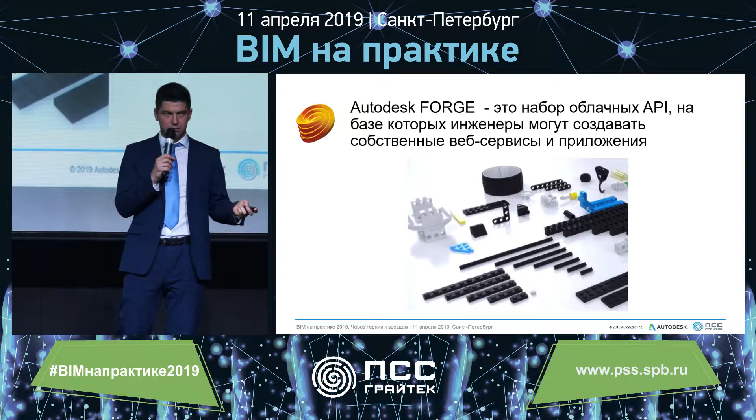I'd like to draw your attention to this definition: that engineers can themselves build their own web services and apps. I listened to the previous presentations attentively, and some of them echoed something about Dynamo. We spoke about Dynamo two years ago, and now Dynamo is a widespread solution for many projects.

So probably we will need to do the same and listen. We will hear the same in two years about Forge. Forge means independent developers, partners, universities, developers, and also customers - it involves customers, people like you. This means that everyone can do this, can be the author of an app.

Vladimir will tell us today about Forge features. But now I would like to tell you briefly about what it's like. There are some Autodesk apps, which you can see at the top of the slide, and there are some other apps and services developed by other developers.

We, on our side, want to use information in any location and at any time. Last year, at this stage, I reported on AI, and today we have some examples on using AI to structure and analyze information and to work with it effectively. People use big data and machine learning methods to be more efficient and to improve performance.

In the center, we see the Autodesk Forge solution, which enables all the functions I've been telling you about. First of all is working with files, data management.

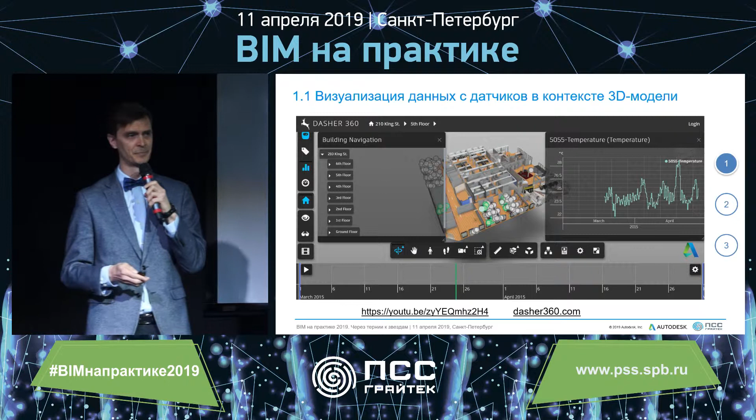It's all visual. We have a web representation of each instance, and we can visualize each of the instances. We can visualize what's happening inside, the dust level and other parameters. In civil construction and in industrial construction, it can also be used. We can track the work of units and equipment.

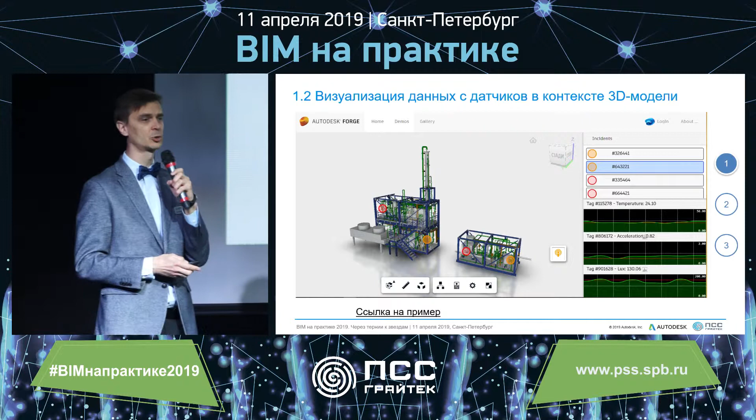Forge can use the 9 modules described by Petr, and we are able to consolidate and unify different CAD systems and consolidate them into a unified database. In this example, there is a simple model that uses data

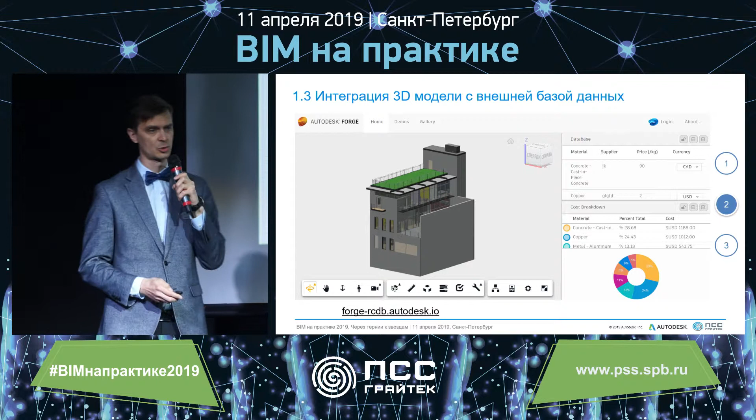about model elements linked to the pricing system, volumes and quantities of concrete. We can add the quantities to Forge, and the total price will be modified, and management will be able to see the changes. So you won't need to do modifications to the web page.

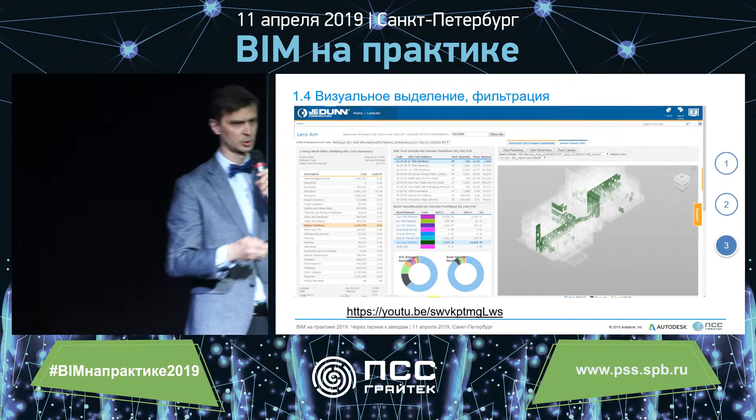It will happen automatically. Another scenario, scenario 3, is about coloring and highlighting interesting elements for decision makers, for management. We see some of the model elements from some of the units that are depreciated, that are getting old and need replacement.

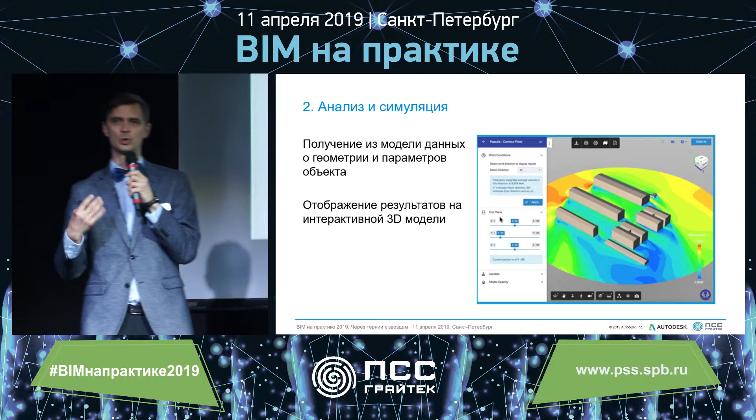The major challenge is when we work with other stakeholders. Very often people do not understand BIM 360 or Navisworks. They are not able to work with this information, use it, or apply it. They need something more, something that can make this task easier for them.

The third scenario is about integrating with our cloud services. In our early speech of Bonava, they use SharePoint Online, BIM 360, and Microsoft Teams, and the foundation of that is a Forge API.

This is the functionality, the feature that is sufficient for BIM 360. The functionality is there, we update it every month. The roadmap is also available for half a year ahead, so we know what will happen next. But users can and want to know more, so we integrate those elements and add new functions and features.

The fourth scenario is called the space scenario. We introduced a function where, using web-based capability, you can do basic modeling without using desktop applications such as Revit, Civil 3D, 3ds Max, etc. You can use just web-based Forge functionality to do some modeling or offload the data. It's flexible, it's easy, it's good.

Another interesting scenario: to ensure user engagement and expert involvement, we use augmented and virtual reality. And this integration is going to be even faster in the future.

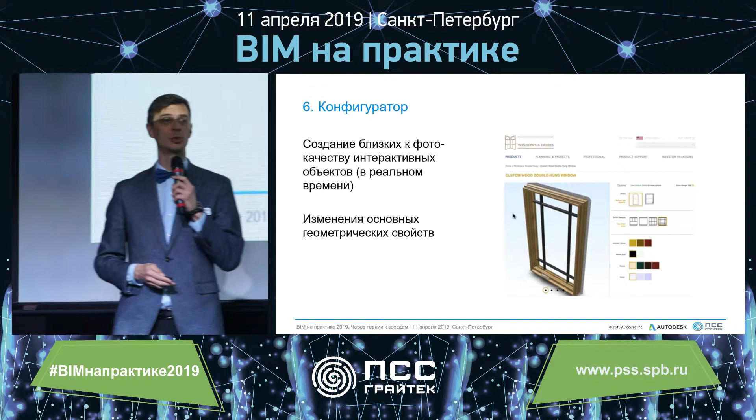Another scenario is the configurator. That's another interesting solution using a web interface. We can allow our clients to set out basic parameters, such as how a window should look, or how an element should look, consisting of one part, two parts, or three parts. So the Forge API transforms the element and transforms it back to upload into the model.

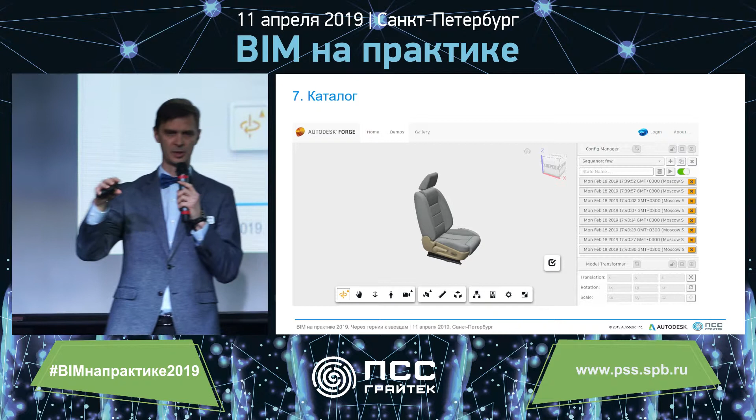Another interesting feature, a very basic feature, is the catalog. It's used very often during the maintenance and operation stage, when an expert selects a certain element and sees the visual representation of this element, and which parameters it has.

So we reviewed all these seven scenarios, and you may have a question: okay, Forge is a cloud solution, there probably are some technical limitations. Well, in fact, there is a nice nuance here.

The dataset can be translated into SVF format and uploaded into a corporate internal server, ensuring local access for your employees to a local interdisciplinary model. When it is changed after a maintenance procedure or something else, we re-upload and update the model, ensuring access and integration of all users without using exclusively Autodesk web-based resources. It's just a nice thing to have.

And last bonus I'd like to show you. There is no link on the slide, but if you send us an email, we'll send you a link.

Digital twin: this is an aviation engine, and you see the integration with several parameters. Performance — you select performance and you see its parameters in real time: rotation, temperature, RPM. And if we select the maintenance tab, we can see each separate element, when it is going to be replaced, how much it costs, who supplies it, and when it's going to be done.

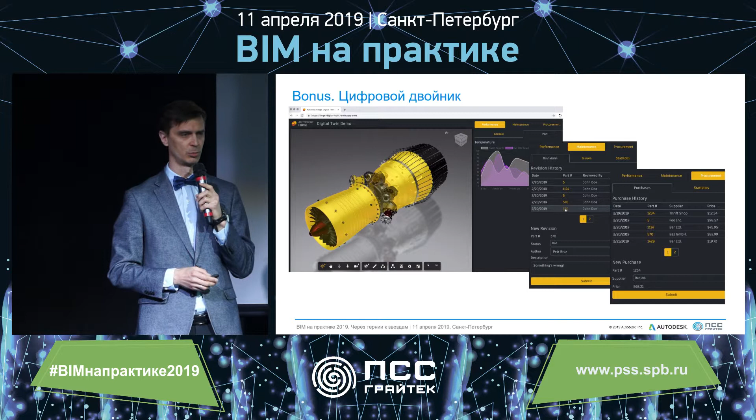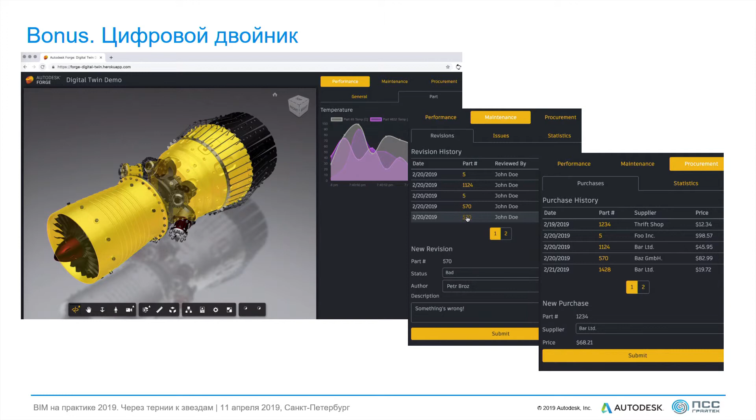And total runtime as well, service life. The web interface also allows you to add additional elements here on the deck and see the frequency of failures of this or that piece of equipment. And the last thing, procurement: cost, supply date. You just push the button and submit the procurement order, the purchase order.

To sum up, there may be different scenarios: engineering data visualization and dashboards, project by project; automation — previous speakers have all mentioned this. We cannot wait until a programmer or technical expert does something for you; this capability allows you to do whatever you want. Like I said several years ago, it's going to be there — and it is there. Are there any examples?

Yes, there are real cases. We welcome you to become one of those 1,500 cases, examples, that use Platform as a Service, PaaS, from Autodesk, to address architectural, design, and, what's more important, information management tasks that help you make informed decisions. Thank you for listening, and we'll be glad to take your questions about this.